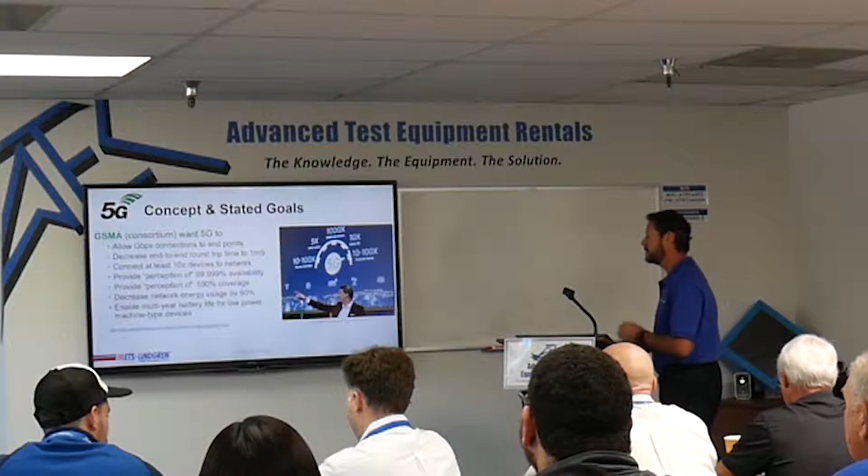All right. So 5G is all the buzz, right? We're getting a constant media bombardment about 5G. Let me back you up a little bit and tell you what the standards committees think 5G should really be. So first off, there's this consortium called GSMA, and they boiled it down into these major topics. This is the CEO of Ericsson. His company's going to make all the base stations that talk to our phones. So I grabbed his slide.

But really what it says is they want to allow gigabit per second connections to your mobile, whatever the user device looks like. They want to decrease end-to-end round trip time to 1 millisecond. Connect at least 10x devices to the network compared to where we are presently. Provide this perception of 100% coverage, 99.999% availability. Decrease network energy usage by 90%. That one really caught me off. And enable a multi-year battery life for a low-power machine device, IoT device that sits out there. So that's what they want 5G to be.

And you know what? We can ignore a good chunk of these goals. So let's just throw some of this crap out first. Network energy usage by 90%? No way. We're only going to get bigger, because now we're going to need 2 sets of radios on every tower and many, many more towers to provide coverage. So there's no way they're going to cut that down. 10 to 100x devices connected to the network. IoT will allow this, so yeah, okay, I can buy that one.

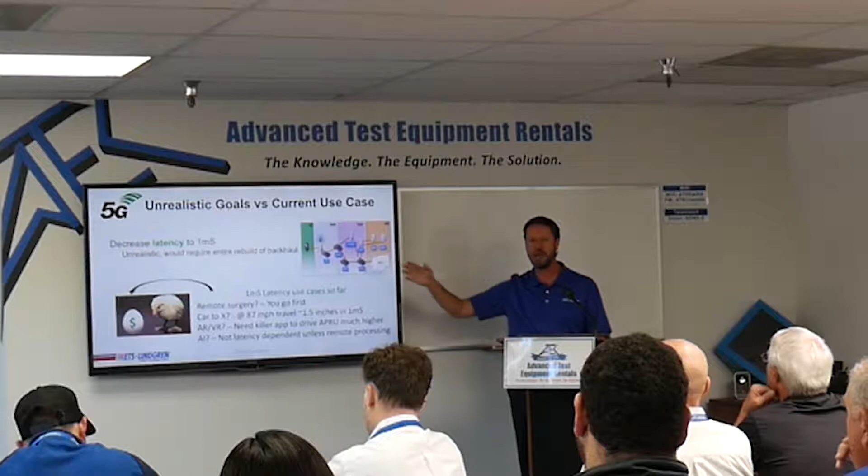There's another one that I think is unrealistic, and that's the latency to 1 millisecond round trip time. Let me tell you why. To decrease the latency, essentially everything from the base station backwards into the internet has to be rebuilt. Think of the infrastructure: every fiber connection, all these bounce arounds, everything from the cell tower back to the network, Verizon's, everyone will have to be rebuilt to decrease latency. And there's no way the ROI, the return on investment, is there for them. Also, I think 1 millisecond is an incredibly hard goal to achieve.

Some of the things they've talked about doing with this 1 millisecond latency connection are remote surgery. You go first. I'm not gonna have some doctor a continent away working across a network connection to do my surgery. The other thing I've heard is car to X: car to car, car to base station, car to traffic, car to something. Even as fast as we drive in Texas, at 87 miles an hour, you're only driving 1.5 inches in 1 millisecond. That's pretty hardcore resolution for an autonomous car. I just don't see why they would need it. You can get away with probably an order of magnitude less resolution. Another one, AR and VR, that's virtual reality, augmented reality.

The revenue has to be there. If there's a killer app other than cat videos out there that drives this, maybe, but I don't see it, not yet. And then the AI that everyone's talking about, unless you're capturing here and then moving it off somewhere to be processed and then moving it back, the latency really isn't the biggest deal with AI. So really I just don't see where that latency, that 1 millisecond thing, is driven from a revenue standpoint.

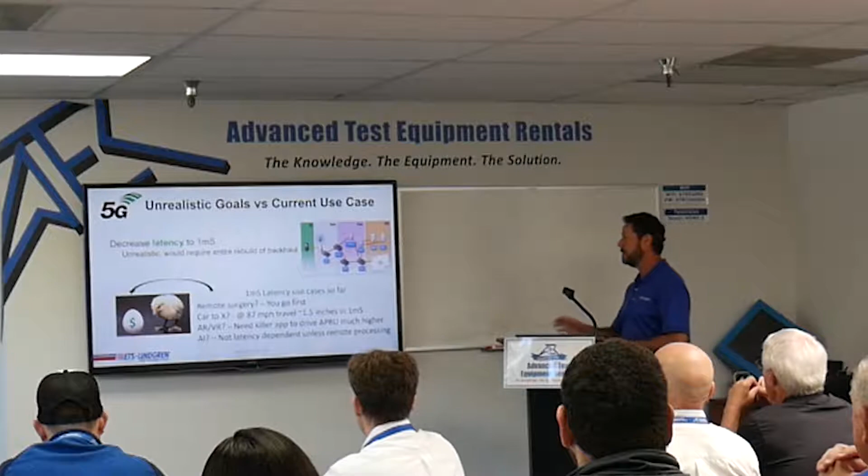Again, it's going to be chicken and egg here, right? So something's got to come out to drive the infrastructure guys to replace all of this. Otherwise, they're just not going to do it.

All right, so then we're left really with this gigabit per second connection that we want to drive down to our mobiles, hockey pucks, whatever it might be. So again, this is cat videos. How much data do we really need? They're assuming that if they build it, we will come up with something. So let's assume they're right. Let's assume some killer app comes out and we all need these gigabits to our mobile device.

All right, so they're going to do this in two ways. First of all, they're going to rebuild what we call the sub-6 gigahertz section of all of the towers that are out there. This is the present network, the LTE network, 3G network. They're going to rebuild that and add some really cool radio technology, antenna technology. Get into that in a second.

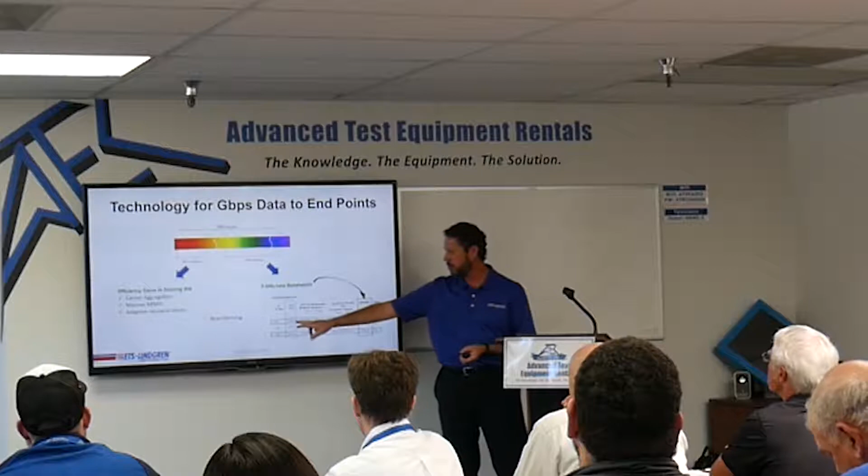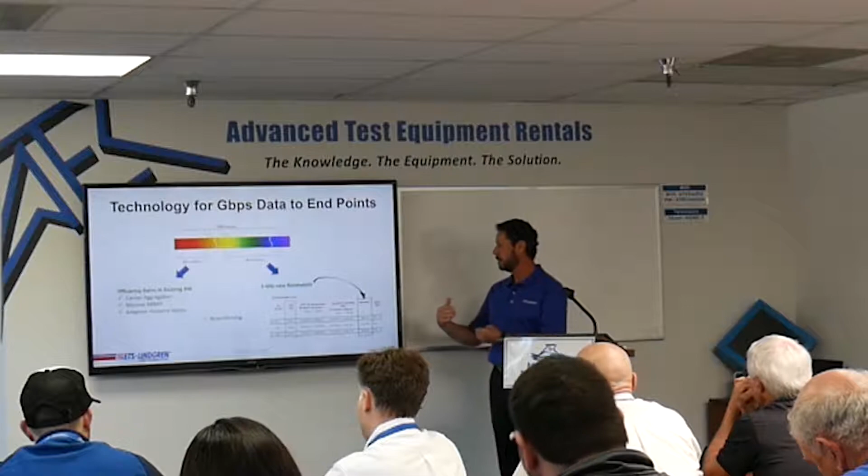The other thing they're going to do is move way up in spectrum into the millimeter wave. So this is 28 to about 60 gigahertz. It's called FR2. There's your buzzword for the day. FR2, frequency range 2. FR2 radios, millimeter wave: what they can do if they move us way up there in spectrum is open up 3 gigahertz of bandwidth down to your phone. Then they can split that up between all the users.

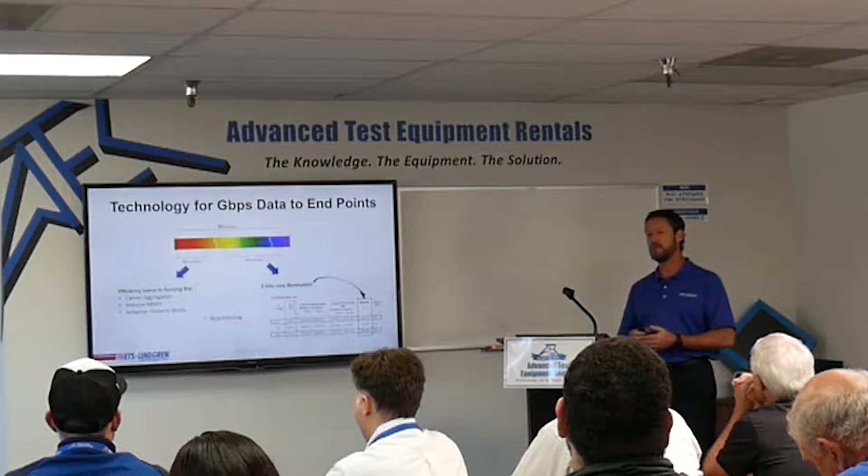So if you remember Shannon-Hartley theory from school way back, you can only mess with a few parameters here when you're trying to increase capacity. One of them is bandwidth, and the other two are signal and noise. Either you can increase the bandwidth, you can increase the signal power you send, or you can decrease the noise. Those are the only network parameters that we have to deal with. And so something's got to give.

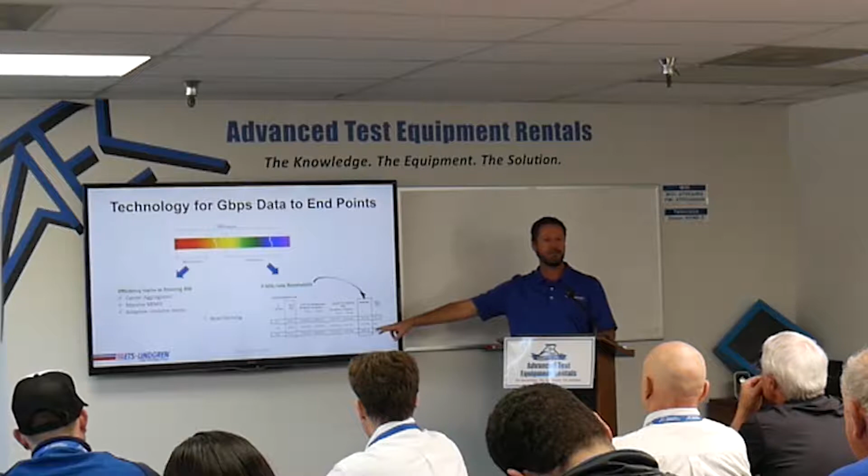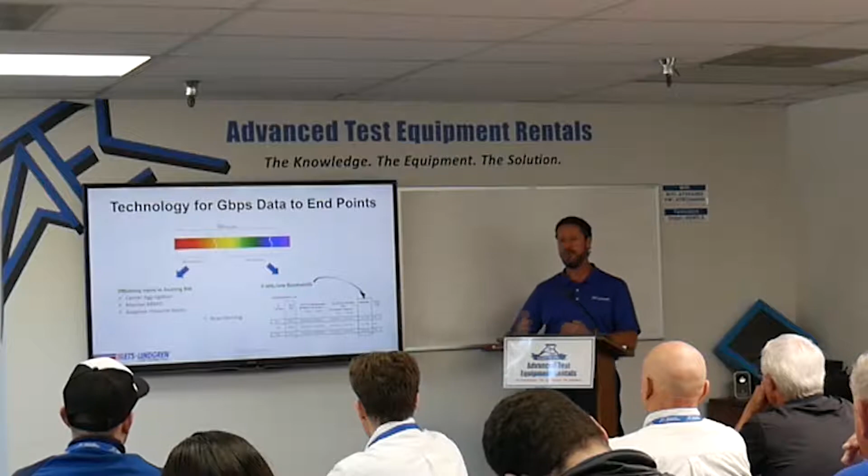Noise, you can't control so much. Signal, the more signal you send down, the more you interfere with other people. So they went the bandwidth route, went to spectrum. Okay, so keep in mind these two splits because we're going to talk a lot about them now.

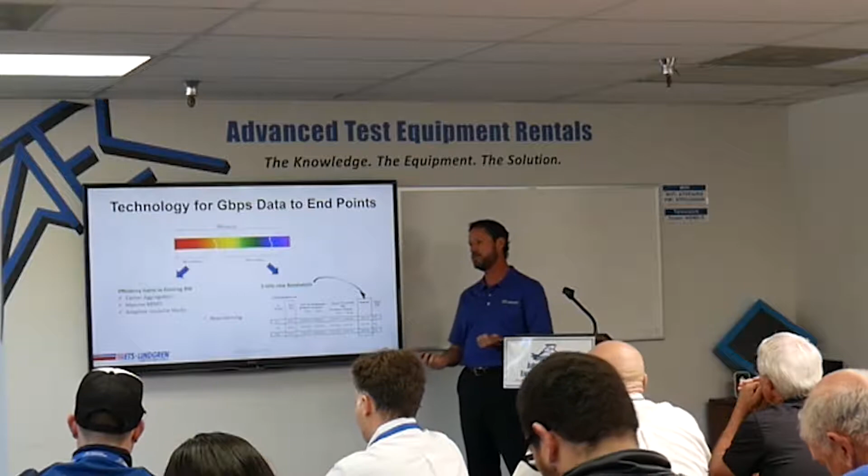First, I'm going to go off on that sub-6 gigahertz. Remember I said the buzzword was FR2, frequency range 2? Well, sub-6 is frequency range 1, FR1. So whenever you hear people talk about FR1 radios and FR2 radios, that's the secret code that they're talking.

All right, so first thing they're going to do is roll out something from the military that's been used for decades. It's called beamforming, and we're going to apply it to MIMO. So beamforming allows you to steer a narrow beam to an individual user. Military guys use this on radar. They use it in their special comms systems, and they can actually direct a beam to a particular user. Why would you want to do that?

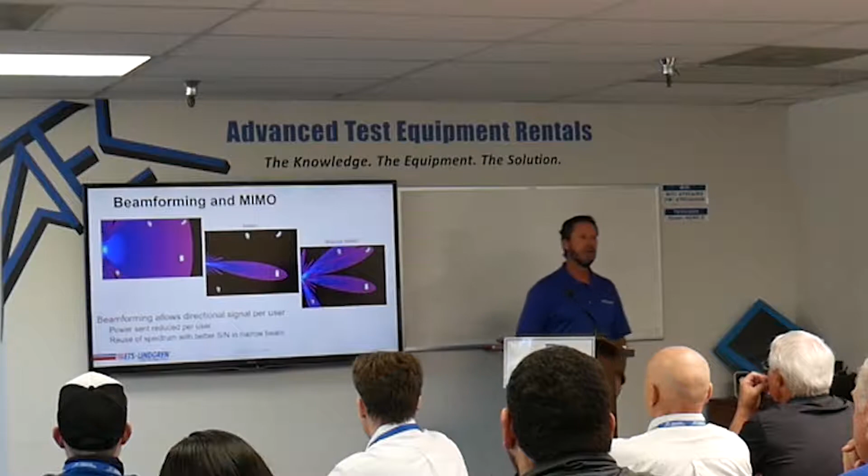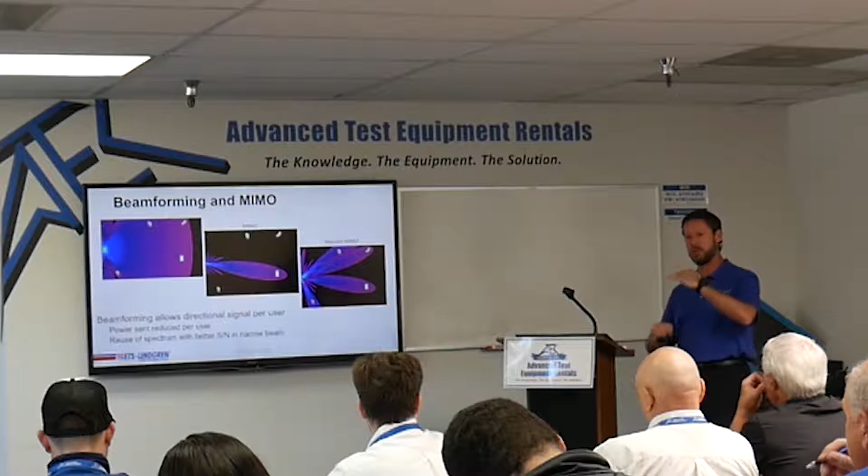Well, first of all, the more power you send to everyone else, that power looks like noise to those other mobiles. So if you can drop the noise, blacken the field if you will, and still get the signal that you need to a particular user, you play with that signal to noise ratio. That's a great win. Massive MIMO is the ability to do that on a big scale, hundreds of devices.

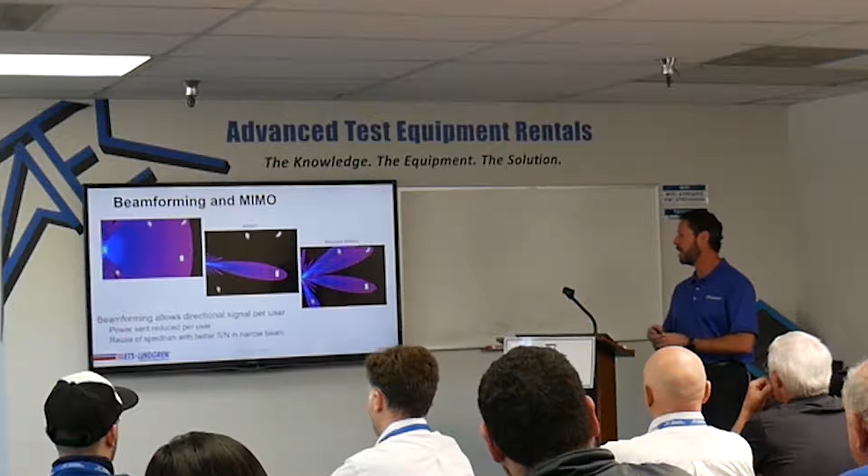So we steer a beam to the devices that we need. And this, as rocket science-y as it sounds, is actually done in the military already. We're going to just apply it to our existing network. And here's the Wikipedia pull about this beamforming, if you will.

It's pretty crazy stuff, but someone way smarter than me came up with the fact that you can phase shift a bunch of antenna elements. Even though up close it's a very spherical wave, as they get out further and further, they combine into a plane wave.

And out here then, you can actually use the phase shift to steer the beam. Then if you lay that down on its side, you get the same thing in the other direction, and all of a sudden you really can steer a beam in 3 dimensions. This is a really fascinating wiki page if you want to pull that up, by the way.

Okay, so now how do we apply that to a test environment? ETS-Lindgren builds the chambers that most people are using for this, and so I'm always trying to figure out how do I build that controlled environment for you to test this. Well, first off, you've got to know the physics of this. Remember, I said that at a distance, these waves start to look like a good, predictable plane wave. That's called the far field of our antenna.

And for a MIMO setup, for a phased array antenna, we have to factor in this range is 2D squared, with D being the diameter of the antenna array. I don't care what your device size is, I care about what your antenna array size is. Now at sub 6 gigahertz, 2.4 is kind of in the center of everything that we do in the US. At 2.4 gigahertz, if I have an array that is 2 meters in diameter, I have to build you a 64 meter chamber in order to be in the far field.

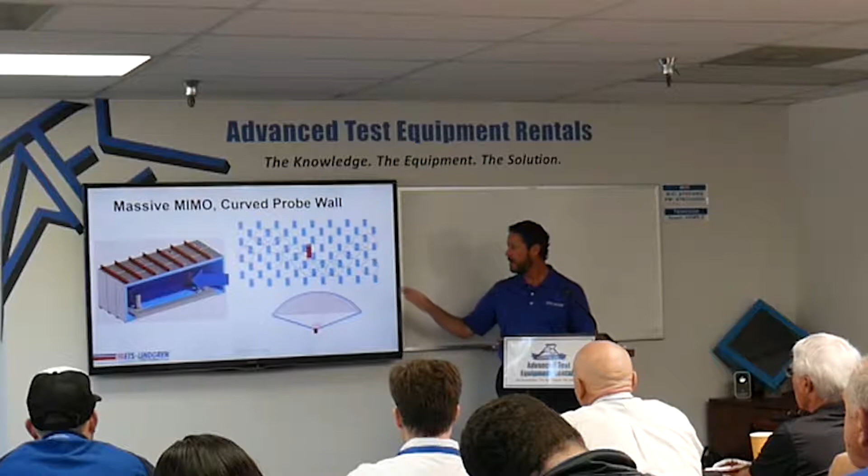Here's kind of an idea of how we accomplished it. It was one of the base station manufacturers. We actually built a curved wall and exploded the antenna elements out, and then moved a device under test that represented the UE, the user equipment, around so that you could see if the beam could follow the user equipment as it moved across the array. This was a big chamber. You'll notice there are many positioners on both sides, because essentially we were trying to test that things were moving like they should. And so that's what we spent a lot of positioning time doing.

So again, big chambers, lots of positioning, and probably not your typical solution here. This is going to be for the Ericssons, the Nokias, Huawei, the people that are building base stations. I saw a question? Yeah, is that the large chamber, 60 some odd feet or whatever, or was that? It's really not that big. By curving the wall and doing some other things, we were able to reduce the size, but it was still a big, big project.

Okay, now we're going to go the other way. That was sub 6. All the fancy stuff we're going to do on the radio side. There are lots of other things that are happening, but from a test standpoint, massive MIMO was the big one. Now we go from sub-6 down to tiny stuff. At millimeter wave, 25 gig to 50 gig, let's just call it that, everything gets tiny and everything gets integrated.

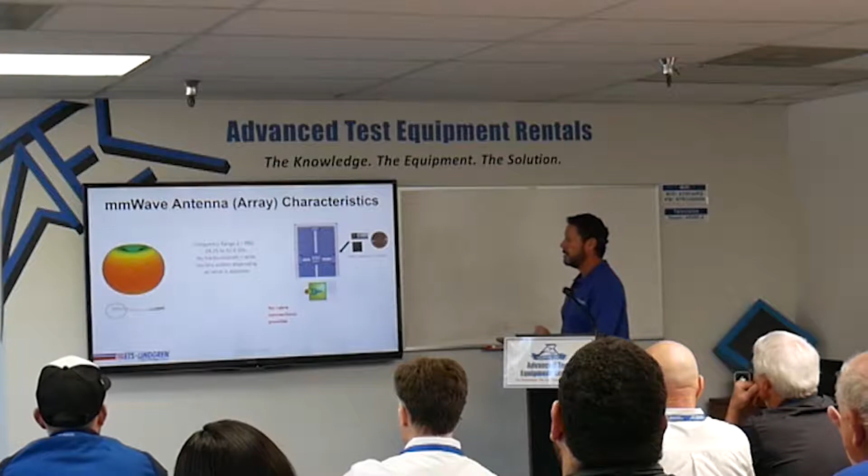And imagine the amount of processing and work that has to take place for that to happen, especially if we're in a car or walking down the street. The other thing to know about this is there are no cable connections available anymore. We cannot cable a MIMO antenna, a beamforming antenna, on this device. Number one, that gets us is the size.

Number two, remember we have to be a certain distance away from this thing before that wave looks like a plane. So even if I could connect onto the individual little dots of the antenna array, I only get one piece of information, and the fact that we're steering a beam, we need the whole array transmission in order to even begin doing testing.

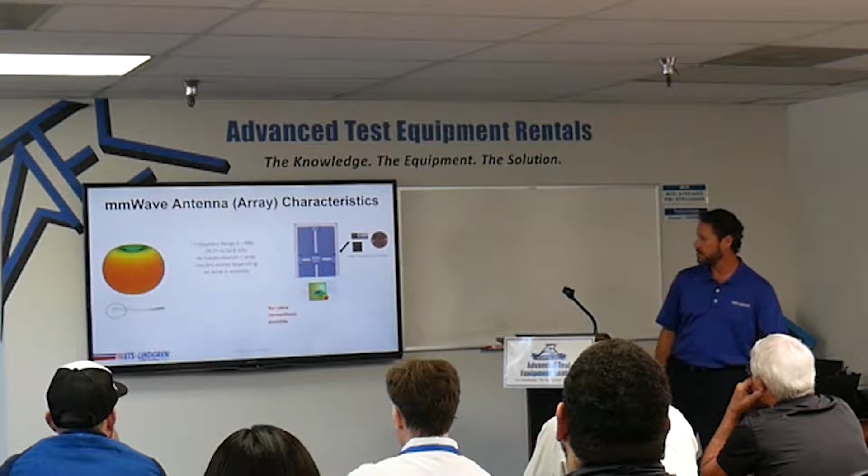So on the left is a typical cell phone antenna that we get now. We're used to having a little connection, a little RF connector. Has anyone worked with those push-on, what are they called, SMPs, SM somethings? They are a pain. They bend, you don't get them on there right, they pop off. Well, the good thing is you won't have to deal with them anymore. The bad thing is there's just no way to even deal with it.

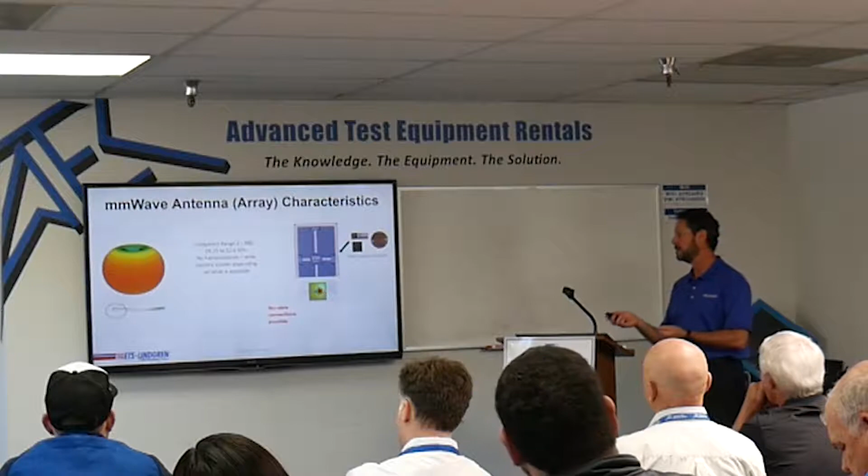So we're also going from an omni to a narrow beam that's moving around. So the testing just went up an order of magnitude in complexity. All right, how are we going to test this? First of all, the first stage for R&D, any of you in the R&D phases on these mobile devices? No? Okay. For the R&D guys, first thing is you got to figure out how to replace the cables.

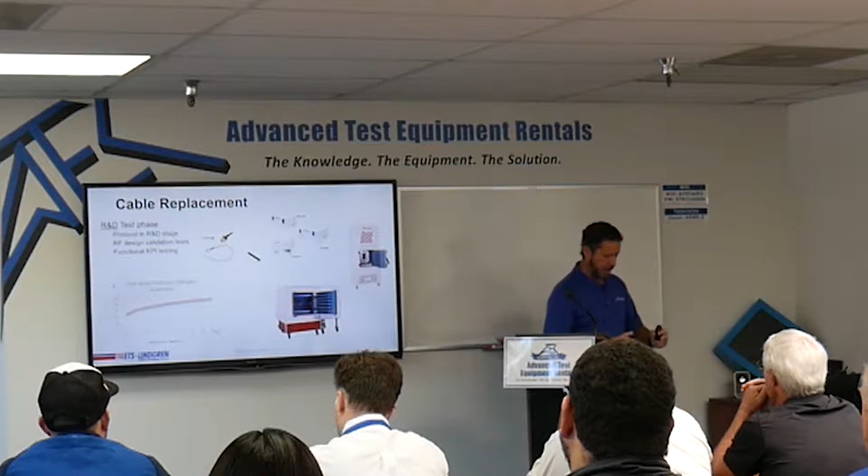You'll need some sort of a link box, something to isolate from the outside and connect the two devices that you want to test. So it can be something as small as a shield box, just that would fit your device and give you the separation you need. If you want to manipulate it without touching it, you might need something a little larger with the positioners inside. But depending on your link and what you're trying to accomplish, you will need something that replaces the cables.

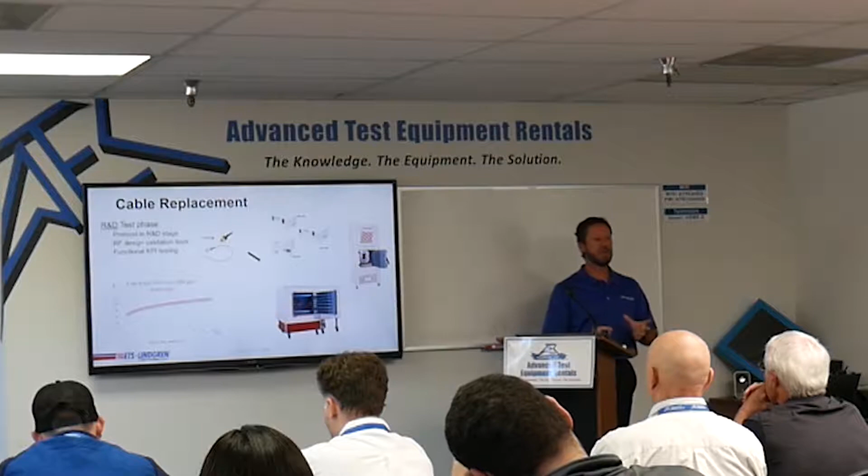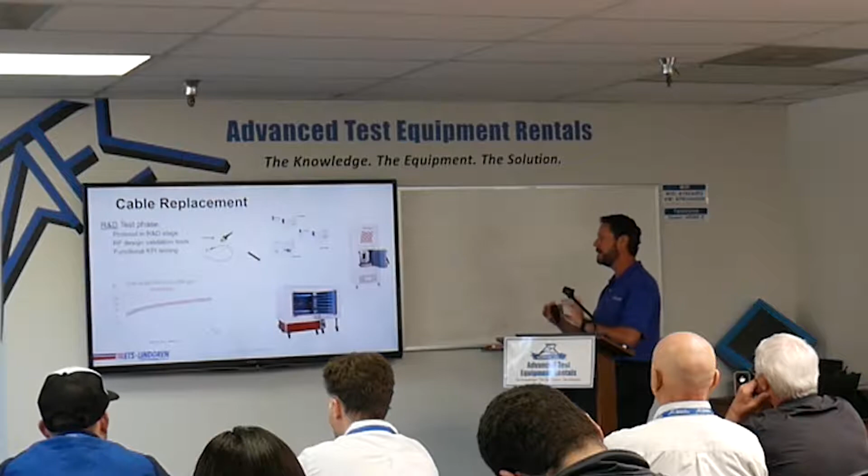One other piece of data to go on here: compared to cables, we're used to dealing with a quarter or maybe a half a dB of loss. We start at 20 dB of loss with these links, and it goes up from there, depending on the distance; it really clobbers us here. So 20, 25 dB of free space loss between the device that's transmitting and the antenna that's receiving is not going to be uncommon at all. So you've got to wrap your mind around the fact that we're dealing with much higher loss characteristics.

Okay, so in order to even begin, again, just R&D phase, just cable replacement. This is protocol guys. These are guys who aren't even concerned about the antennas, aren't even concerned about the RF characteristics, what happens if you grip the phone a different way. They're simply concentrating on the chip-to-chip stuff. This is where they'll stay, in just replacing the cables.

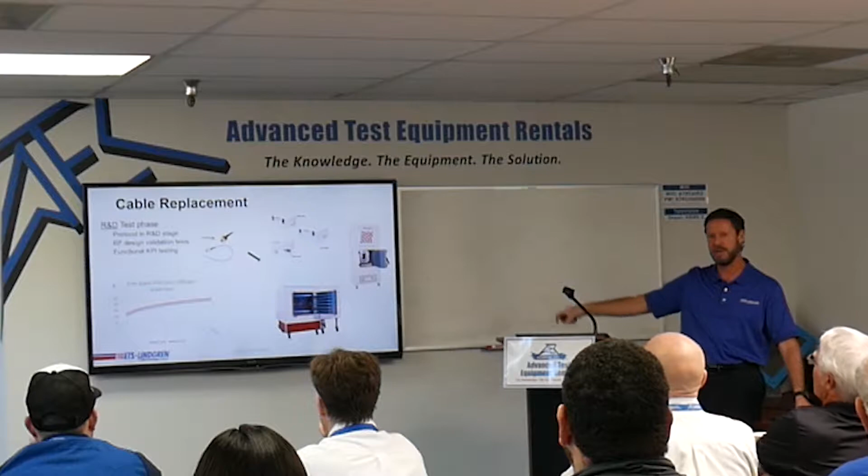Those of us who have to quantify all these other parameters, you know, walking through the room, how does this device do, grabbing it different ways, what happens to the antennas, what happens to the link, what happens between antennas. So Wi-Fi plays nice with Bluetooth, plays nice with millimeter wave, plays nice with sub-6. All of those things are going to require an environment with a very controlled set of parameters. So 3GPP leads the standards bodies on issuing this information for us.

3GPP has a technical report called TR 38.810. Just a little light reading for your nightstand at bedtime, right? So what they did is they said, okay, for all the other tests, protocol conformance, carrier acceptance, all these other tests, we want this environment to have multiple angles of arrival. So we transmit from various antennas. We want it to be able to move its axis of rotation in 2 dimensions. And we want to be able to fade between one link and another. That would be to simulate a handoff from one base station to the other.

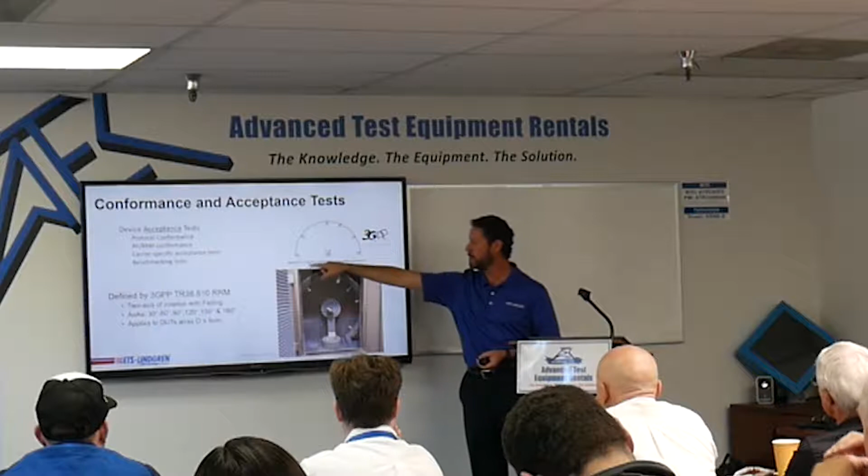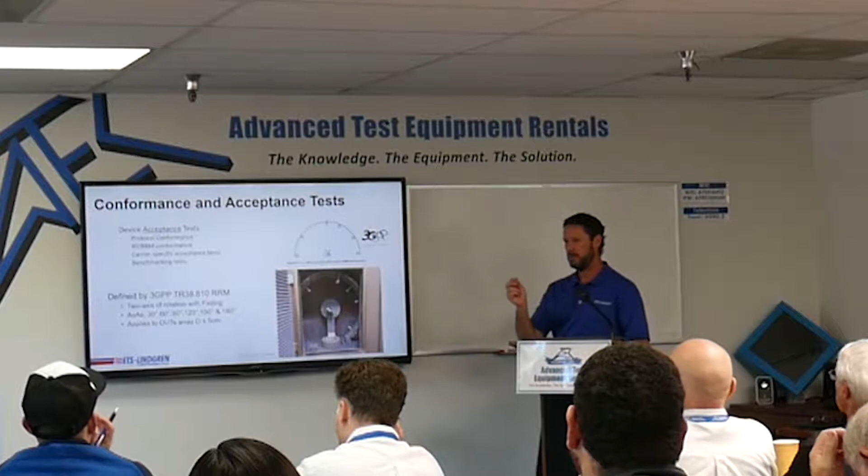And so this is the figure straight out of the standard, and this is what we actually built to conform to it. And it's a complex beast. I said, where did all your lab space go? Well, I just took what most labs were doing with a cable and a small connection, and I turned it into this. How big physically is that? It's about a refrigerator, a little bit larger width than a refrigerator. Would you need a bigger one for the base station? Yeah, exactly. Base station gets really complex because, remember, the antenna array is what matters.

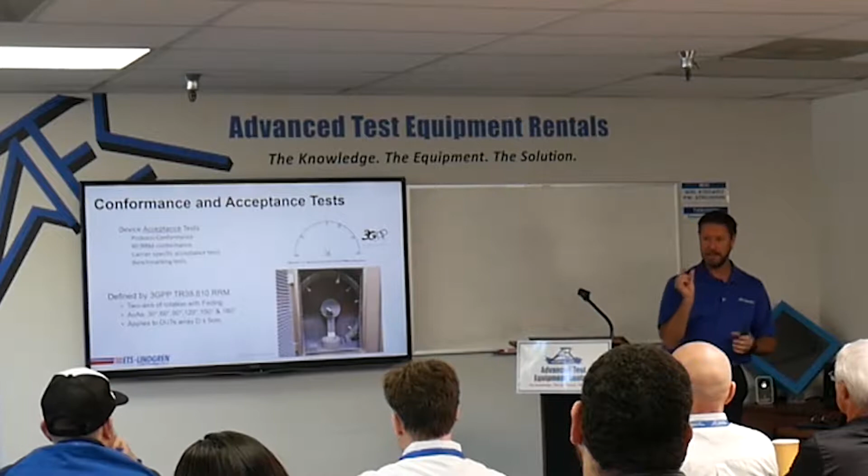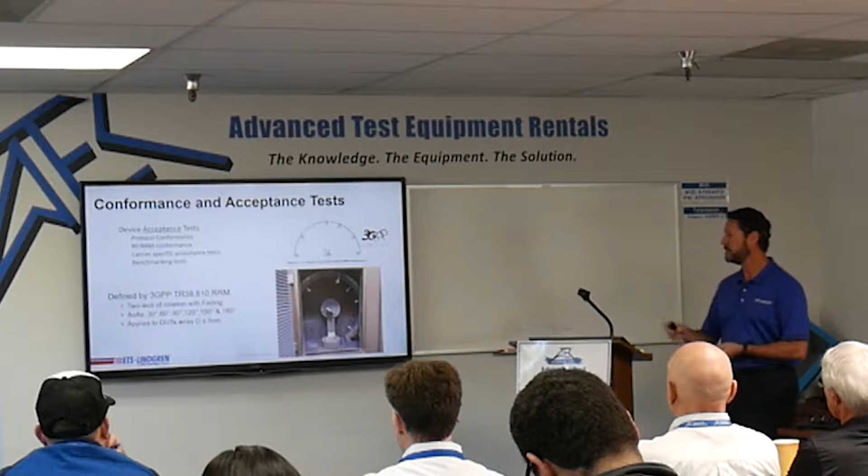I don't care about how big the device is, I care about that antenna array, and that dictates the size of the range. So yes, base stations get way bigger. We'll lead into that. Okay, so how are we going to do this? All right. Before I go on, I just want to point out how complex this is going to be.

Okay, so far-field calculation. Again, I don't care about the device size. What I care about is where the antenna is on that device. From the antenna to the receiving antenna, I calculate the range. Well, now I have 4 antennas on this device. What happens when I rotate it? That range changes by double even. It changes all as I start moving it. This is going to be really fun.

We're used to about half a dB of measurement uncertainty. We call it ripple. When we calibrate a chamber, that's our figure of merit. Anything more than half a dB of ripple inside kind of says we need to go look at the positioners again. This is going to be orders of magnitude more. And I don't know how to wrap my mind around it as a test guy, what we're going to come up with.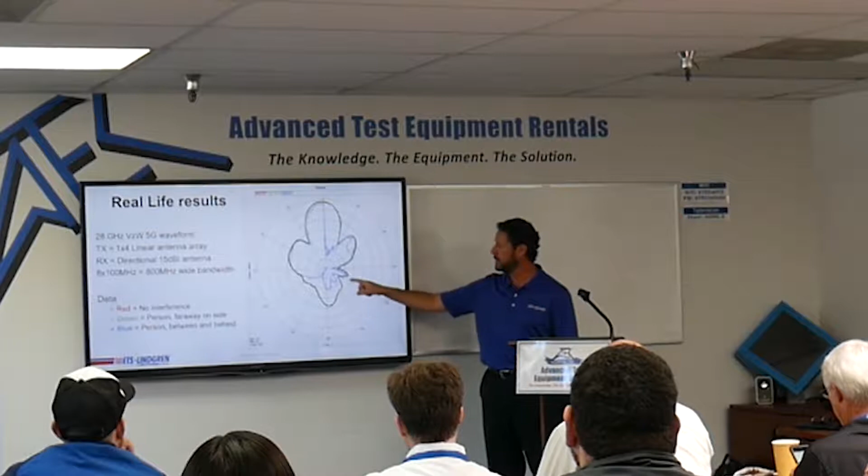I left this in; I took it out of my other presentation. This really does matter. Let me show you how much it matters. The red is the typical, no interference. The green is a person off in the corner of a chamber, essentially. What we did is we put a phantom. You guys know phantoms? The heads and the hands and things that you stick inside these chambers. Stuck a phantom in there, and it affected it a little bit, especially over here where the phantom was. So the green versus the red.

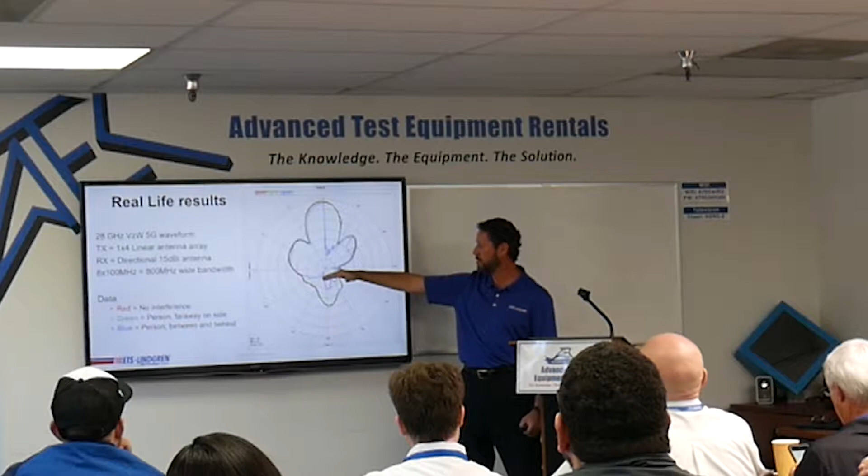But then, for the blue, we actually put a real person in the chamber. And look at how this whole side just collapsed. The main beam, especially, half of it is gone. And the whole back section of the array is almost gone and collapsed. So red versus blue was a massive collapse of the field on one side of the device under test. So this does matter. Rain does matter. This is all absorption? Yes.

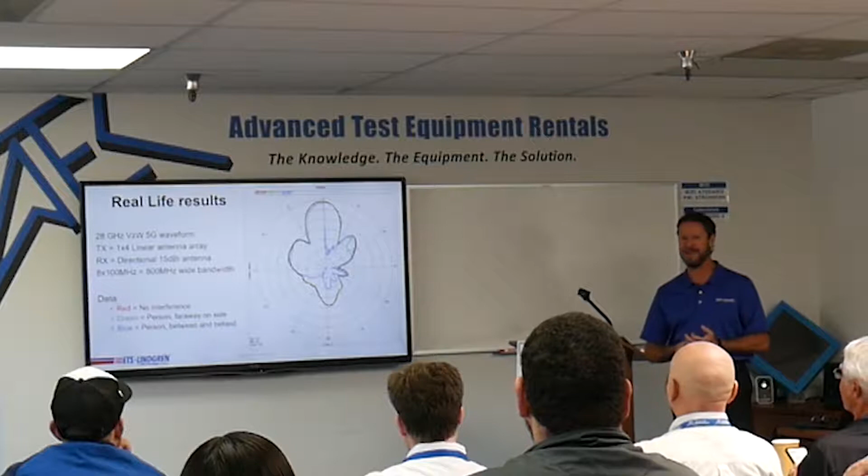We think the market will go past. So in the next few slides I'm going to tell you the environments that the 3GPP standard has laid out as standard environments. We think it's going to need to be more complex, at least for the true device integrators, the Apples, the Samsungs, the people that we pay $1,000 every 2 or 3 years for these phones. Those guys will need something that will quantify what's happening as I rotate this, and it's going to take a more complex system than just what 3GPP has laid out.

We think it will end up being something like this, where we're not just focused on the main beam. We want this guy to steer. We want him to steer around obstacles, or when I put my hand here. Well, 3GPP has said, just ignore the steering. We're going to lock down the beam and just focus on the main lobe, and it's just not going to be good enough. People are going to want to know what to expect out of the device when we want it to steer.

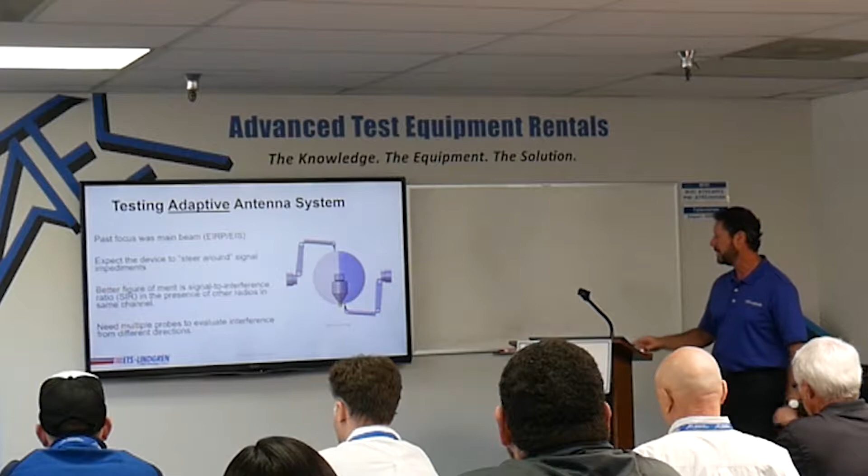So we think that a complex positioner like this will be needed. We actually have a patent on this. So we can move, we can probe, these are receive probes. As we move this, we also try to track the steering beam. That's what we think it will turn into. But 3GPP has said, okay, we've got to start somewhere. Where we're going to start is we're going to define 3 scenarios.

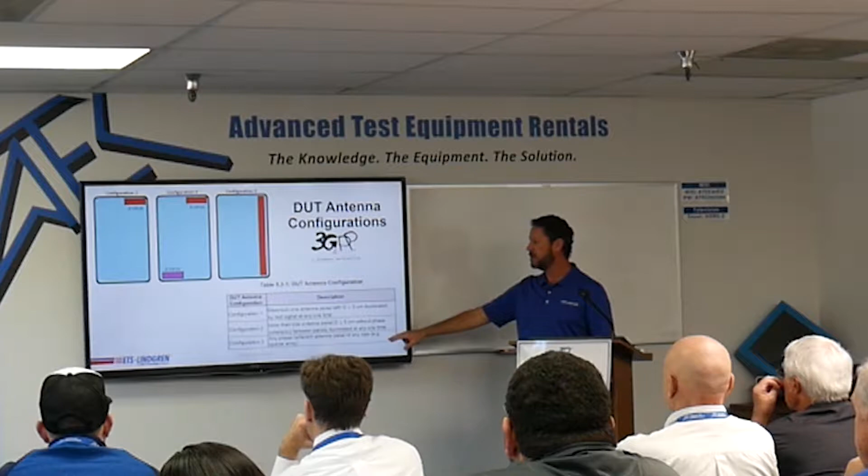First scenario is just one small millimeter wave antenna array up in some corner of the device. Configuration 2 is 2 devices that are working together. They're coherent. And configuration 3 is a much larger antenna array, over a good chunk of the device, or maybe a base station or something of that nature. And they say, okay, as long as we lock down these 3 configurations, what sort of an environment will return some usable information?

So another table, they said there are 3 methods: direct far-field, indirect far-field, and then a near field, where we're using a software transformation. Okay, these are pretty typical. Anyone heard these things? This is straight out of antenna theory. We build the same sort of environments regardless of the application, because these are what work, right?

We would love to build direct far-field chambers everywhere, but they get really big. Indirect allows us to get a little smaller, and near field gets really small, but then a lot of other things go wrong. So, 3 acceptable test methods, and what do these look like?

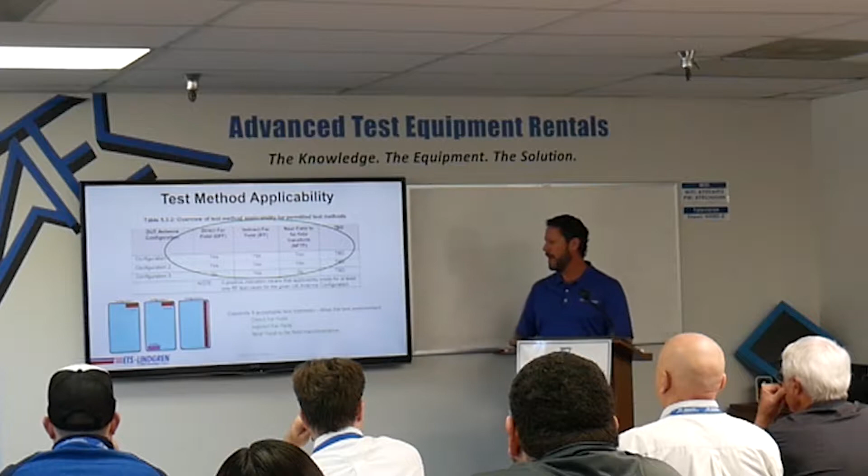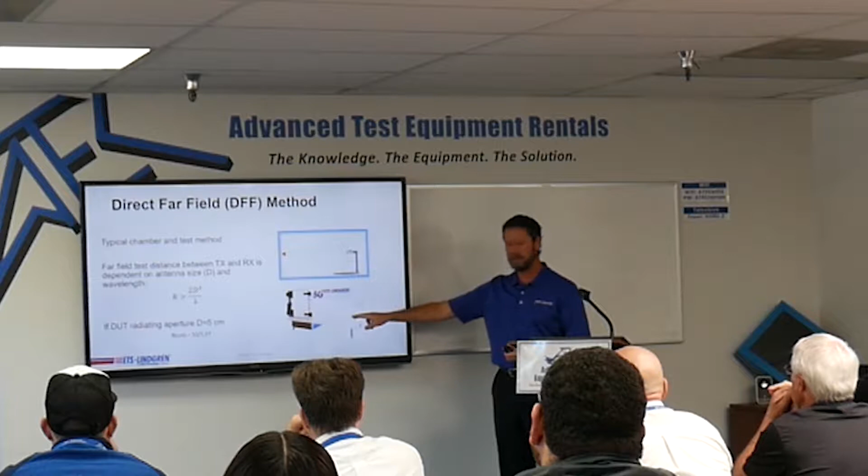Okay, first off, the direct far-field method, and that's your typical chamber. You've got a device on one side, you got a receive antenna on the other, you maneuver the device around, and you draw an antenna pattern. For a 5G device, this is our solution, and it is nearly identical to the size of the table that's in front of you. So it would sit on this table. Door here, receive antenna on the other side, and then the positioner inside there. So this tall, that long.

But again, what are you replacing in your lab with those devices, and how many of them do you need? What's the throughput? How long will the test take? These are a lot of parameters that we don't quite know yet. So your lab space maybe just got a little smaller if you need these. Okay, so direct far-field, the pro is that it's simple construction and it's known art. We've built thousands of these.

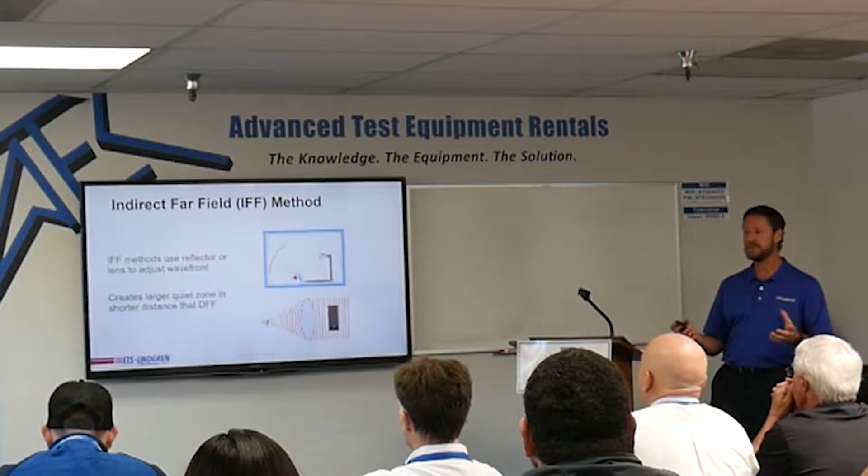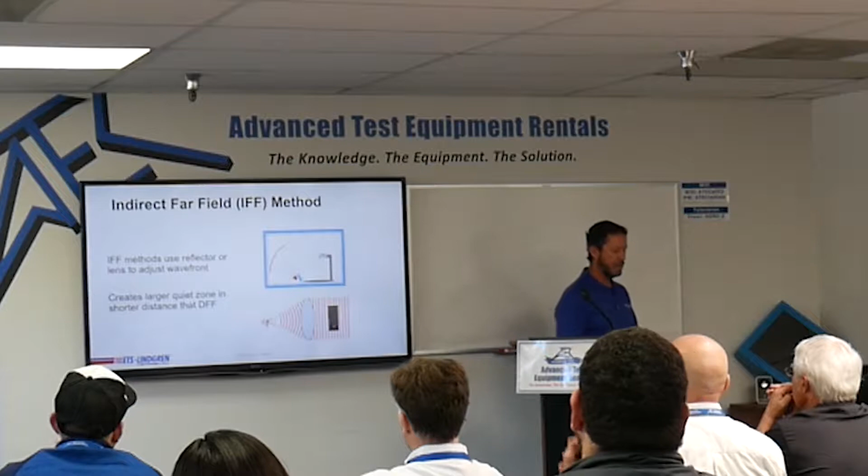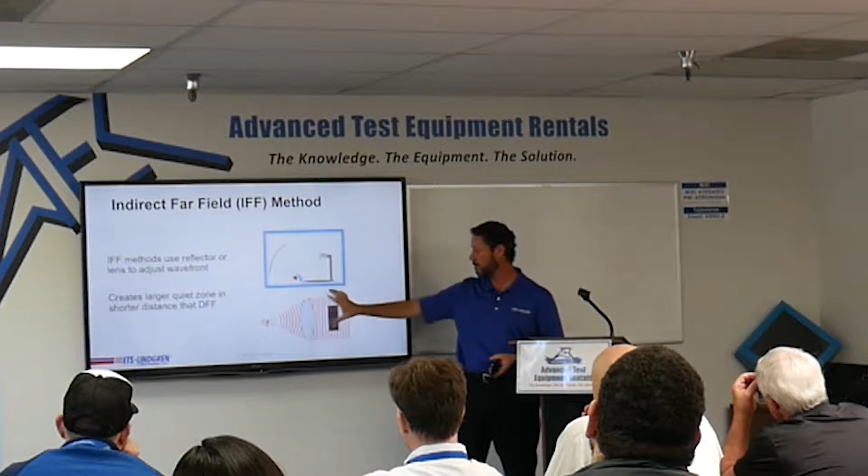Okay, indirect far field. So this is crazy. Really smart people came up with this. Essentially, we use a reflector or a lens in the near field to bend the signal so that it appears as a plane wave by the time it gets to our receive antenna. So receive antenna here or here. It works in reverse as well. In this case, the device is transmitting, we collimate it and feed it to the antenna. Or it also works in reverse where you transmit from this antenna, it hits a plane wave, and then we can test the receive sections on the device.

So here's a better way to simulate it. The simulation actually shows you how this works. If we transmit from here, we bounce off the reflector, and in a very short distance we have a nice plane wave that we can test. But these reflectors are very expensive, take a lot of engineering, and are very complex to build as well. So one of the cons is that the indirect far field tends to be more expensive. You can do a larger quiet zone in a smaller space.

To Gabe's point, a millimeter wave base station is probably going to look like the control boxes you've seen mounted on light poles or traffic signals, about this size. The antenna is going to be mounted right on the metal box, or whatever the box looks like. The electronics will be inside the box.

And they will have to deploy millions more because a typical link for a millimeter wave station is like 1,000 feet. So nearly every couple of street corners, we're going to need one of these base stations, versus a typical 4G LTE base station tower that covers kilometers of people, of devices, of connections. So if we need to get a base station into a chamber, we probably need an indirect far-field method.

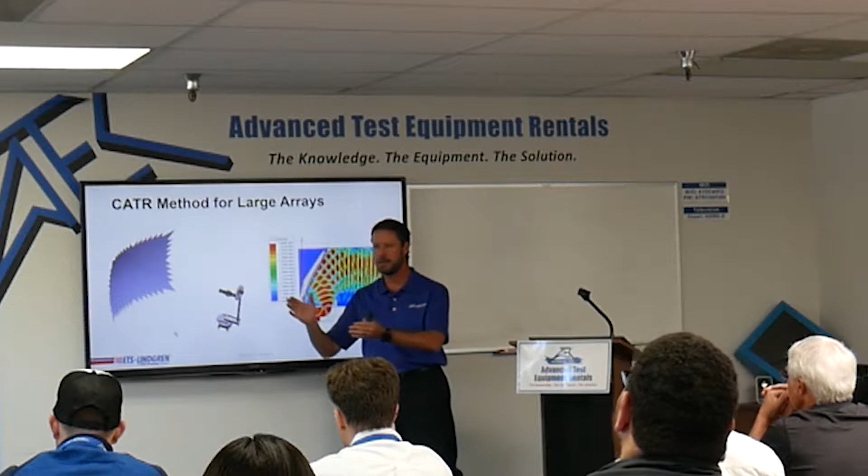But again, they're expensive, and anytime that I adjust something, I have to make adjustments inside the chamber. So, for instance, you'll see a lot of rails here. Anytime you change frequency or device or how much things are moving, you have to adjust the back and forth of this antenna and also the angling. So your test setup takes a lot of preparation to get right and accurate before you can actually start testing.

So indirect far field may work for some, may not work for some. The last method they announced was near field, and this is a nice compact chamber. We only have to be 2 to 5 lambda away from the device. Lambda is wavelength. Then we turn it over to software.

So we make a bunch of measurements, we step that probe around or move the device very carefully, and then the software takes over. And the software, knowing all the parameters of the transmit and of the receive and of the path, can make this fancy thing spit out that tells you the antenna pattern. We do not make the software for this. We don't offer this method.

There are a few people around that do, but the big thing to know about this one is that it's really a transmit power only. There's no receive or quality tests that are available here, because when we're using QAM, right? We're using amplitude modulation. So in the near field, AM doesn't behave in the same way that it does in the far field, and so things get very complex very fast.

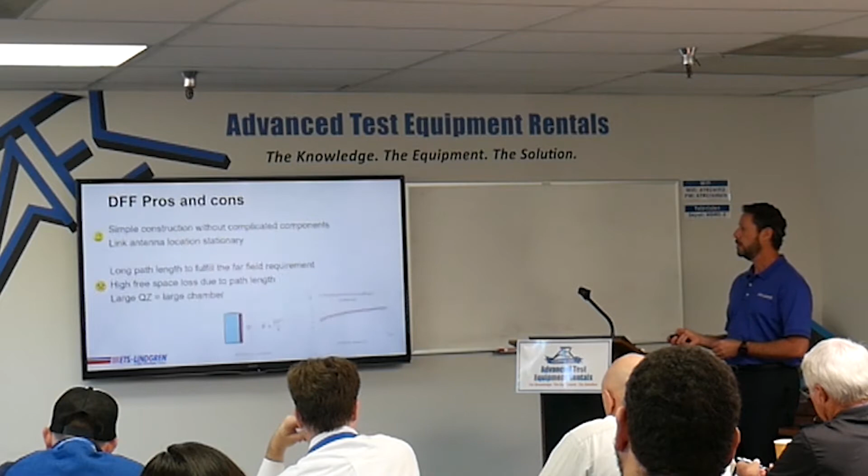Security is going to fall to the manufacturer of the device. So you're talking about someone trying to hack you with RF or something? That's outside of what those of us who buy the devices can control. It's going to fall back to those people who build it. It's not as easy to do that via RF. They will need to build protocols that sense that and lock it out. It's a protocol thing that we won't be able to control, but it does happen.

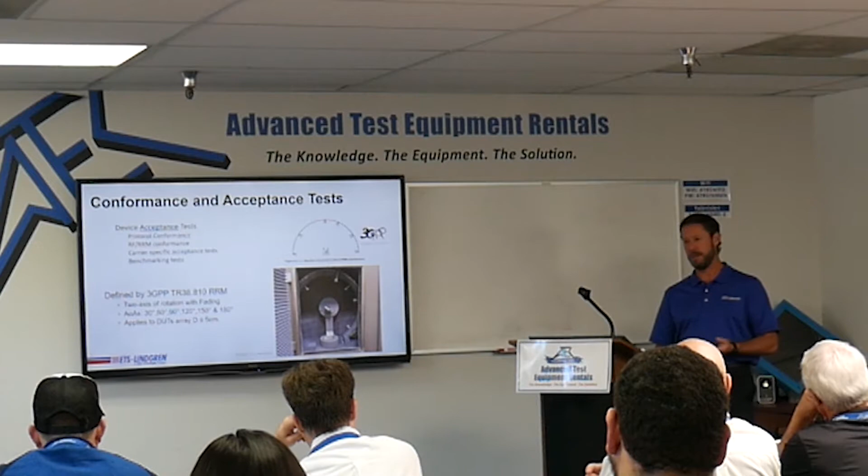Where I thought you were going to go with this is how do signals from the outside mess up the test? That was part of it, right? And in that case, this is a shielded environment, so it's a big metal box that, once we close the door, you have about 100 dB of shielding from whatever is outside of the room. So that part we can control.

But if someone's determined to spy on or hack into your device, that's going to be something that Apple needs to differentiate itself with. There might be a separate standard for cyber security on this. I wouldn't be surprised to see that.

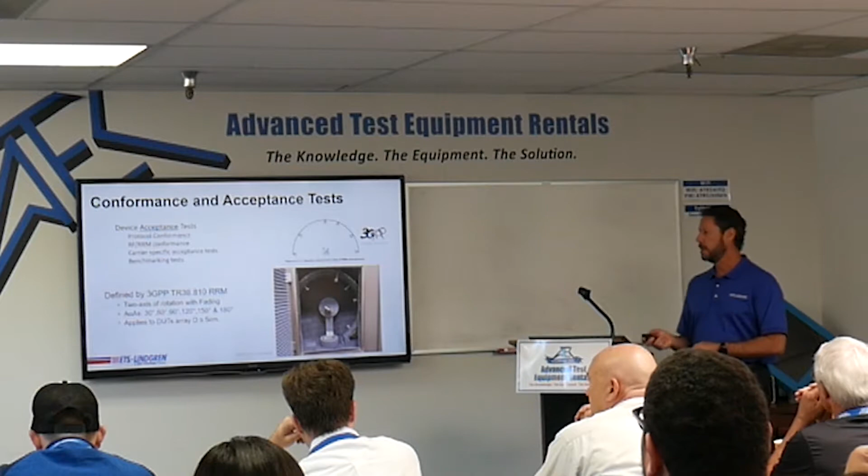Yeah, Ron? As far as multiple devices at the same time in operation, are there any standards that talk about that? So you have multiple phones in close proximity, how the beamforming adjusts? So the only thing that we've done so far to address something like that is this sort of big chamber with multiple positioners. In that case, we put multiple phones and multiple base stations and then twist them around, move them around and see how they play together. Hugely complex, and these are all R&D things. There's no standard that defines how this all should come together, so that's really an R&D phase.

Yeah? Yeah, you talk a lot about UEs, testing, but how about, I know it's very early to talk about that, but an IoT device that is not a UE, let's say a medical device, can you comment on how different it would look? So we have to be careful about our terms here. UE is anything, really the system that we're talking about is a one to many, right?

The one is the base station, well, that's what we just always call that, and the many are user equipment, whatever form they take. So if it's an implantable device, medical, if it's a phone, if it's a fixed wireless, if it's a machine, something, we just generically call those user equipment, UEs.

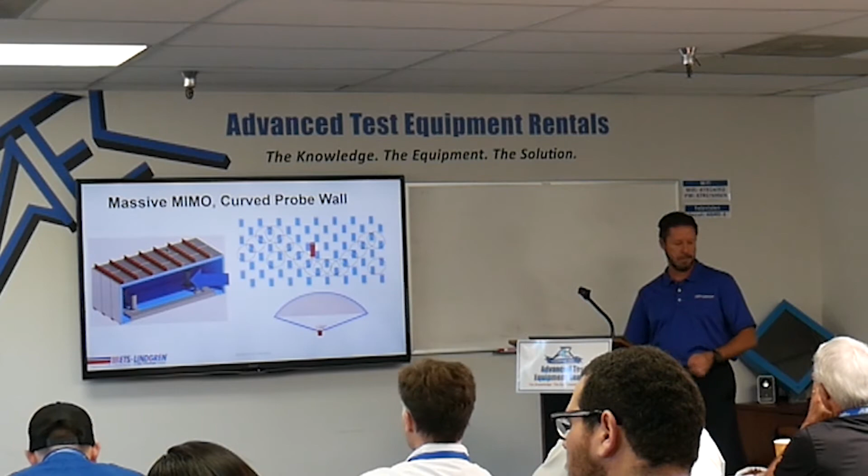In the case of beamforming, currently how are the user equipments doing this? Are they doing this in baseband, the phase shifting, or are they doing this in the analog right before it's going to the antenna? So, yes. There is baseband, and what we're really concerned with there is called pre-distortion, right? So we want to make the signal the best it can be when it hits the antenna and is sent out. And if we know what the antenna looks like and its pluses and minuses, we can pre-distort the signal so that when it does hit the antenna at the RF stage, it's as good as it can be. So that's done in baseband.

Most of beamforming though is done at RF, and it's probably IF. We're using phase shifters. So phase shift between, call this a 64 by 64 grid of a base station array. It's probably going to be about this big. We phase shift between all the elements and steer the beam that way. But that's IF or RF.

So is the beamforming also going to be on the UE side, right? Yes. So the digital pre-distortion is probably for other characteristics, but for the beamforming itself, like you said, in the UE, sometimes there might be 4 antennas. So all the beamforming is happening at the antenna level? Yeah, again, back to the Qualcomm picture. Oh, I went too far.

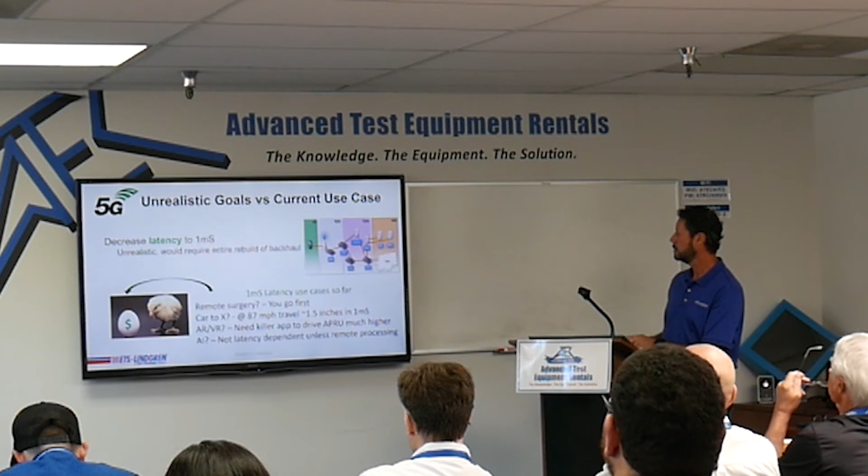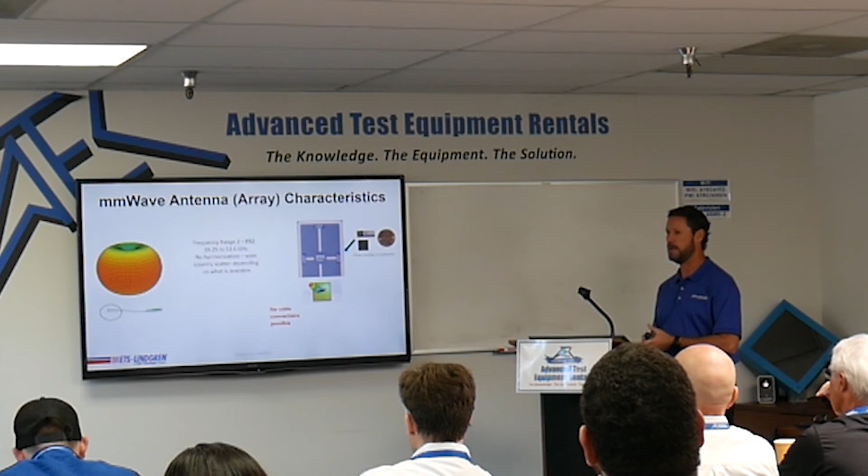So there's a chip that's right on the back of this. So the antenna array and the processing, I believe this connection between the modem and this chip is probably IF. And so then there's no way to distinguish what's going on inside of there. Therefore, it's got to be IF to RF beamforming going on. Any Qualcomm folks here? I don't know the black magic. I'm sure it's closely held and patented up the wazoo, but that's what they claim it will do.

We have one last question, and then we're gonna take a break. Any more questions at all? If there is, I'll ask another one.

The round trip time you said was targeted to be around 1 millisecond. That's what they want. Just to get some perspective, what is the round trip time for LTE? Oh, I do not know that. Anyone? I would guess probably 100 milliseconds or so. That's just my guess. Maybe even more. Depends on where you live and what connection.

LTE especially changes its modulation the closer you get to the base station. So if you're close to the base station, you can go up to 64-QAM, and then your latency is much lower than if you're further away. Higher data rate. Yeah, exactly. Higher data rate. So with that, thanks so much, James.